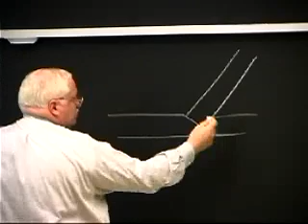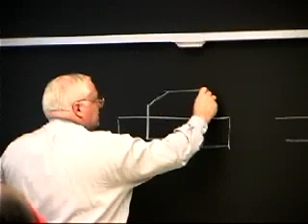So as a result, in design of joints for aluminum welding, if I have an angle, not angle iron in aluminum, but an angle coming into some other piece, in a piece of steel, if you have some structure or some frame for a bridge or something, you would come in and you would just weld right in here. But in aluminum alloy, typically, you will take the base plate and you may put another plate on here that you can weld over a long area.

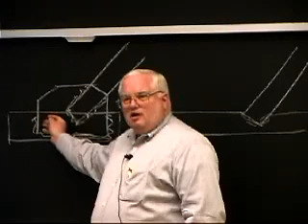And now when you bring in this other piece, you're going to weld it to this plate and you'll weld over a much larger area because the joint has half the strength. You're going to put gussets and other things in here in order to be able to get longer joints. These typically are going to be fillet welds. I mean, if I was making a joist out of steel, I'd just bring the two in here and put a fillet weld on there.

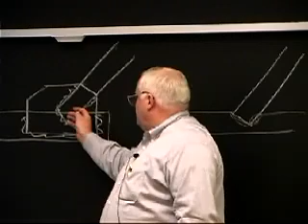The weld strength of the steel weld for typical strength steels is equal to, or maybe even 30–40% greater than the base material, because the faster cooling rate of the steel gives a finer structure and greater strength. In the heat-treated aluminum alloys, I'm not going to have that advantage of a stronger weld, and so I do all kinds of things like put gussets and stuff in the structure, which just adds to the cost of the structure. But it is the typical way they do it.

A lot more clever, if you will, a lot more attention to the detail of design of the joint in aluminum structures than in steel structures. Steel structures, sticking them together, assume you're going to get 100% joint efficiency, leave it to the welding engineer. Aluminum structures, if it's heat-treated aluminum alloys, you assume you will not get 100% joint efficiency, and you're going to do something in your design to put your joints in a less highly stressed location or reduce the stress on the joint. So just to bring that up.

Aluminum is weldable, very weldable, more weldable than steel by electron beam, less weldable than steel or other materials by laser. In the other tapes when I talk about laser welding, I'll talk about the reason, but basically aluminum is a wonderful reflector of light, and laser is just light energy, so I only get about 5 to 10% of my energy in on a laser weld in aluminum, whereas with electron beam, the electrons penetrate the aluminum and you get nearly 100% energy absorption. So if I want to use a high power density process, electron beam is the one of choice.

We've talked about resistance spot welding briefly, where you take two sheets and clamp them between two copper electrodes and pass a big current for a tenth of a second. I think I passed around a spot weld at one point, but that's the way you typically put automobile bodies together. In theory, you can spot weld aluminum sheet for automobiles. The thing is, Ford has a spec for steel sheet that you have to get 2,000 welds out of one of these copper electrodes. By the way, the resistance spot welding process was invented by Elihu Thomson in the 1880s.

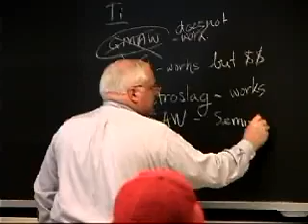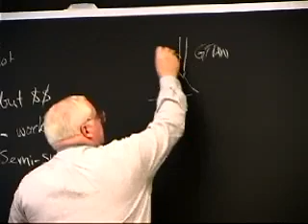And what happens is, if you're doing gas tungsten arc welding, which is a very slow process, you typically can't go above a couple of 100 amperes. So you have a tungsten electrode, W is the symbol for tungsten or Wolfram in German, and you weld this little bead here, and you're lucky if you get an 1/8 of an inch depth of penetration from that process.

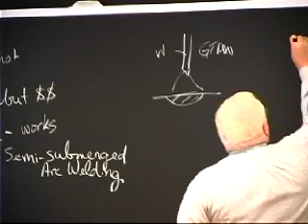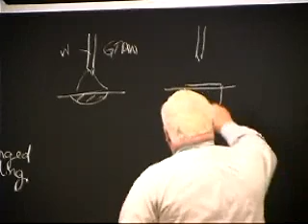It turns out the Soviets learned that if I put a little layer, just paint on a layer about a 1/4 millimeter thick of certain types of fluxes like strontium fluoride. They tend to be halides, fluorides and some chlorides. I could get maybe a 1/2 inch deep penetration, and I could run this arc up to 1,000 amps, whereas this one might be limited to 150 amps.

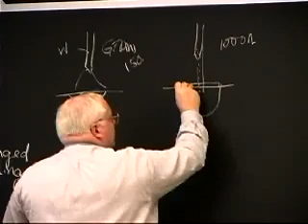If I actually take that electrode and I might start it on the surface, but when I get going, this weld pool will be depressed. There's a force of the arc that depresses the surface, and I actually then now drive my electrode beneath the surface. So what's semi-submerged here is the tungsten electrode is buried beneath the flat surface of the plate. And now I'm putting all my heat in. If you will, maybe I'm only getting a 1/4 inch of penetration, but I'm doing it a 1/2 inch deep. I'm basically plowing through the zone.

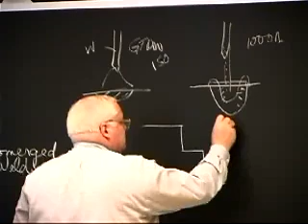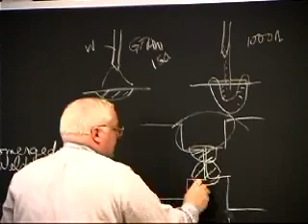And so if I was someone who wanted to weld 2-inch thick titanium, I could prepare a joint like this, and I could put in a 1/2 inch deep weld here. I could put in a 1/2 inch deep down here, and then I could put in another 1/2 inch weld here. I have 4 1/2 inch, in 4 passes I could weld 2-inch thick plate with this semi-submerged arc process.

Using the types of currents, 600 to 1,000 amps or more, that I might use with the old submerged arc process, but in a different process with just a very thin layer of this flux. This flux changes the arc energy. And this process, when the former Soviet Union, in the mid-'80s, when detente and glasnost and stuff, and the Soviet Union started looking for foreign exchange, they started selling this process in the West.

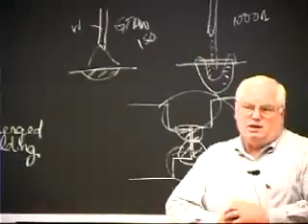And so you'll find the Edison Welding Institute has been working on this for 15 years under Navy sponsorship. And so they're working on it on stainless steel. A number of people have worked on it. We did some work in the early 80s on this, but we never got to that kind of sophistication because, frankly, 2-inch thick titanium is kind of pricey for university research. But anyway,

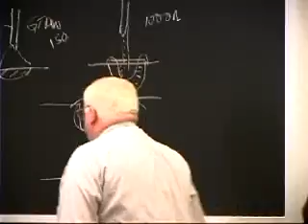these two processes are probably some of the more useful processes for welding heavy section titanium. It can be done. The Soviets learned how to do it, and if we had to do it, we could, but there are other problems with titanium submarines, such as the creep fatigue interaction, which I don't know that anyone's ever solved. That's not a welding problem, but it is a problem with titanium alloys. So, so far as welding titanium in general, oh, there's one other process, and that's electron beam.

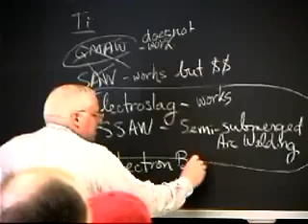The Navy in 1980 had a workshop. It was this workshop where I kind of brainstormed this idea of Electro Slag. Not that it was my idea, I was just saying, what had the Soviets been publishing on that they had quit publishing on? And those are the two processes I just described. And then later, I actually did have a chance to see some foreign technology.

Electron beam. At that conference, the first day was Navy Day, and the second day was Industry Day. And the conference was on welding heavy section titanium. On Navy Day, we all reported on 1, 2, and 4-inch thick titanium. I was the only non-Navy speaker.

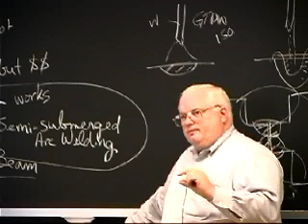On Industry Day, we had Grumman and Boeing and all these big aerospace companies talking about heavy section titanium welding. The heaviest section any of them had ever welded was 1/4 inch. Okay? So to them, heavy section was a whole different ballpark than what the Navy was interested in. It was sort of interesting to see the dichotomy.

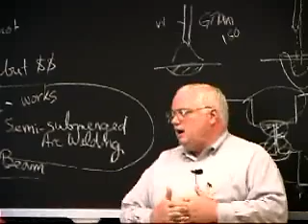But since then, a few years ago, DARPA wanted to build not a spherical submersible, but a hot dog shaped submersible. What do you call them? Slender. Okay, a cylindrical object, right? And these were going to be 4 feet in diameter, and 50 feet long. They were going to build 2 of them. This was all part of rapid prototyping.

I don't know if you remember, after the Gulf War, one of the big things was rapid prototyping. You're going to put something in production and have a completely new part out there within 2 months that had never been designed or built before. And so there was this big program over here at the Draper Lab, which was non-classified. It was only the application of this 50-foot long submarine that was classified, and I never learned what the application was.

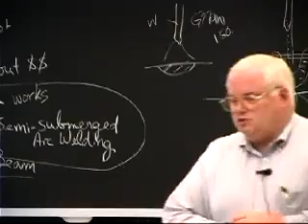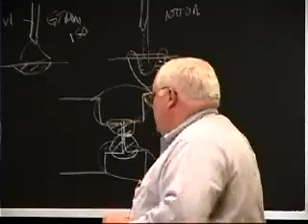But the contract and building it was completely non-classified, but they had to do ring-stiffened cylinders in 1/4-inch thick titanium. The wall of that submarine was 1/4-inch thick, with T-stiffeners. And in fact, I ended up working with Draper on that.

And most of what they did, since we're only talking 4 feet in diameter, you could go to electron beam vacuum furnaces in the aerospace industry and build up a bunch of these things that you would then finally put together by gas tungsten arc welding, which also works, but is very slow, okay? And that's how they built these. The first one was built in 6 months by just using aerospace technology, if you will.

Problem is, you're limited to about 4 feet in diameter, so there's only so much you can do on those. But so the Navy has built titanium submersibles. Actually, that was by DARPA. But now, when you're doing gas tungsten arc or electron beam or anything, welding titanium is a white glove process. A fingerprint on titanium has enough hydrocarbon in the oils to create porosity in the titanium welds.

Give you an example. Back in the late 80s, I'd just come back from a 2-week trip to Japan, and there's a phone call from a company down in New Jersey that makes catalytic converters for the 747. Did you know there are catalytic converters on every jet? Because there's a lot of ozone up there. I guess there's supposed to be less now than there used to be. But anyway, you can't breathe ozone, you get a headache.

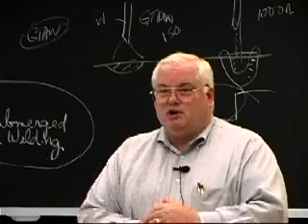I can tell you that same story up here at General Electric, aircraft engines, where they had porosity, and I told them how to do it. They were cleaning it with acetone, and I said, this is an electron beam weld. Is this reagent grade acetone? And the guy calls me back. He says, no, they get it out of the 55-gallon drum in the back. Anybody in non-reagent grade acetone has usually got a film of oil on the surface.

So anyway, I ended up going up to General Electric. They had this little squirt bottle for the acetone. I took a little glass slide. There were 17 engineers from General Electric there, all looking over the shoulder. And I squirted some of the acetone when no one was looking on this clean glass slide. And you could just see, what do they call these, Newton's rings or whatever?

When the acetone evaporated, it just left a little layer of grease. Okay? So they were cleaning it with grease, basically. And you're supposed to get the grease off. They were degreasing it with grease. So anyway, in that story, which I haven't told you half of, I told the engineer that had called me in to go buy a bottle of reagent-grade acetone. And they started cleaning it with reagent-grade acetone. They had no failures for porosity in the welds in the next month.

And he called up to complain that all he got was a letter of commendation. He got no cash compensation. What I didn't tell you in all this is because I was doing some research with him, he had asked me to do that visit for free. And I said, well, I didn't even get a letter of commendation for telling you how to do it, and I told you what to do on the phone without going up there.

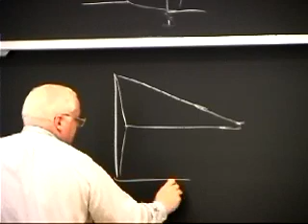And the reason is the same type of thing I told you about the aluminum alloys. The nickel alloys have a similar type of phase diagram where a highly alloyed nickel is going to be, this is percent of something else in the nickel, and this is temperature, and you've got this wide freezing range. It turns out to get the good properties in the nickel alloys, this is typically where we are out here. So you have a wide freezing range, and that's why you get the cracking. Same reason you get it in aluminum.

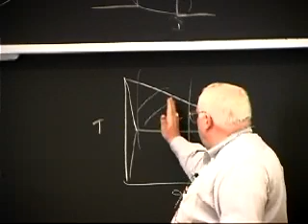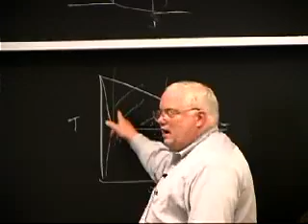In aluminum, we can either adjust to be very rich or very lean in the alloy composition. In the nickel alloys, well, you don't want to go very rich because you're trying to get high temperature out of a lot of these alloys, like for a turbine blade. So you can't go over here. You have to have enough to give it enough strength. If you're too lean, you can't get enough high temperature strength. So you actually end up in this region to get the high temperature strength. And you try to weld it, you have this big solidification range, big thermal stresses because of the big delta T, and you get cracks.

That's not to say that we can't repair them. This actually is a turbine blade, and it does have a sharp corner, I just noticed. So don't cut yourself if I pass it around on that sharp corner. I'll grind that off. This is one where the crack was too big to be repaired. I think they typically only allow cracks up to about 1/8 or 1/4 of an inch on a used turbine blade to be repaired. But you can repair them by diffusion bonding. You can repair them by TIG welding.

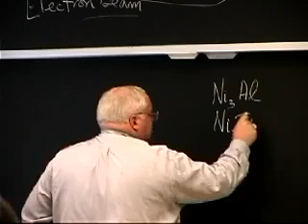The problems for the high temperature alloys are that you typically have nickel-3 aluminum. Now you have aluminum in there and it forms this gamma prime phase, which has wonderful high temperature properties. The problem is it cracks big time. You really cannot weld a high aluminum nickel superalloy. And so what they do is they change that and use titanium, and there are actual plots you can go to for weldability, and you basically look at the aluminum titanium ratio. And the more aluminum that's replaced with titanium, the more weldable the alloy is. Direct correlation. Less cracking with titanium than aluminum.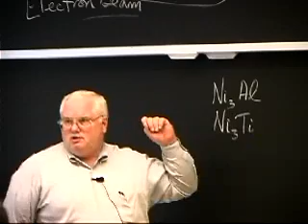Not quite as good high temperature properties, but the weldable high temperature alloys like Inconel 718 have titanium replacing some of the aluminum. There are actually some alloys where they completely replace it. Can't remember which ones they are right now. But in general, it's just sort of a trade-off between the aluminum and the titanium and the weldability.

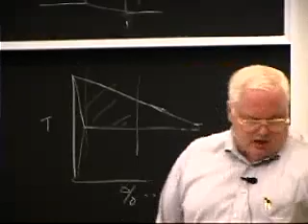They can be welded. A lot of research has gone into their weldability, mostly because you're talking very high value added parts. A turbine blade can be worth $4,000, and if you screw it up and you can't repair it after you've tried to repair it improperly, then you've got problems. But you really can weld most of these things.

This I've actually brought a couple of times. This is not really a welding thing on nickel alloys. This is actually a shroud from a jet engine, and so the turbines are going through here. Just to give you an idea, this actually has to do with brazing. If you haven't gotten to brazing yet, I'll talk about it in the other lectures. But they put a honeycomb seal in here. And the honeycomb is just very thin nickel-based superalloy that's brazed up against here.

And as the turbine blade ages, it's hot, it will actually grow in length because it creeps, right? It's under stress, centrifugal stress, and it's hot, and it will creep over time. And typically, I think they're allowed like 3% growth over the life of the blade. And so they actually have specs. You measure the length of the blade when it comes back, and if it's within a certain limit, you can repair it, and if not, you've got to scrap it because it's already stretched too much.

But in fact, you don't want to leave a gap there because you're trying to compress air here. And if you have a gap, things are going to leak past. So basically, they make this honeycomb structure, and the blade, as it grows, starts cutting into the honeycomb. And you can see here where the blades have cut a little path through the honeycomb. That makes the air seal from the spinning rotor to the stator case, so far as that goes. But that's just another thing with nickel-based joining.

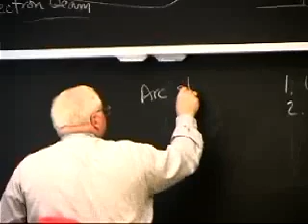If they have to get a critical weld, they typically will build a dry habitat around it, pump the water out, put the welder inside the habitat, and he can weld. However, if you do that and you're down very deep, or even in wet welding, you run into other things. Typically, an arc is only stable below about 30 atmospheres. Now, anybody know what 30 atmospheres is in feet of depth? 300 meters, 1,000 feet.

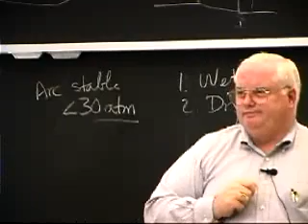So that's the deepest you can go with arc welding, unless you want to go to a chamber that is basically a submarine that you can depressurize, okay? Now you got to build this around the structure. You also have to recognize that the cost of a tender up above is typically anywhere from $100,000 to $1 million a day, okay, for the ship that's going to be servicing the welders that are down there.

If you're going down to 1,000 feet, if you're a diver, you know that to prepare to go down and get in the water at 1,000 feet is like 2 days of preparation in a hyperbaric chamber, and then to come back out is another 2 days, okay, of depressurization. So if the guy gets 2 hours of working time down there, it may take 5 days on site to get 2 hours of working time. So underwater welding gets pricey real quick. I mean, you can get 2 hours of work for $5 million in some cases, okay?

So there's been a lot of work on it. The oil industry does work on it. The Navy does work on it. It can be wet or dry. The problems are the pressure and the quenching from wet welding. But the pressure is a problem in any case. You really can't do anything below about 1,000 feet. And in practice, you don't do a lot below 200 feet. So most salvage operations don't weld unless they absolutely have to, okay? You do a lot of fastening and bolting and things.